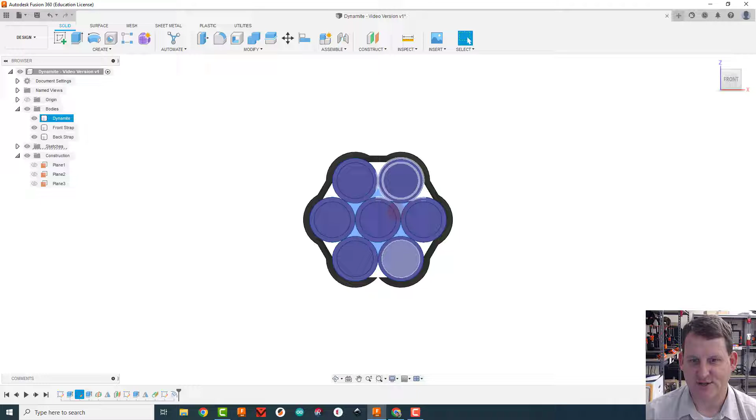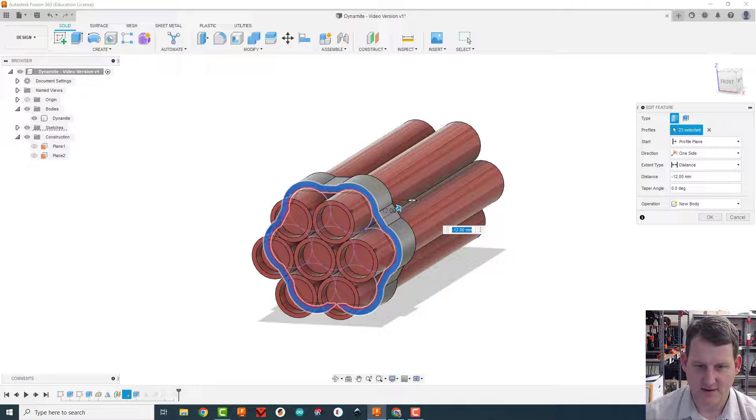I'm going to right click on it and do edit sketch. Actually I didn't want to do that, finish sketch. I actually don't need to fix the sketch, I need to fix the extrusion. So this is the extrusion that made, you can see it made that piece right there. If I right click on it and do edit feature, I can click to the front view and say, okay, yeah, I'm missing that little piece right there. And when I click OK, it's going to fix the front one, and because the mirror was after it, it's going to fix the back one as well. So everything is perfectly fixed now. How cool is that? You can just go back in time, fix things, and they ripple through and fix everything else.

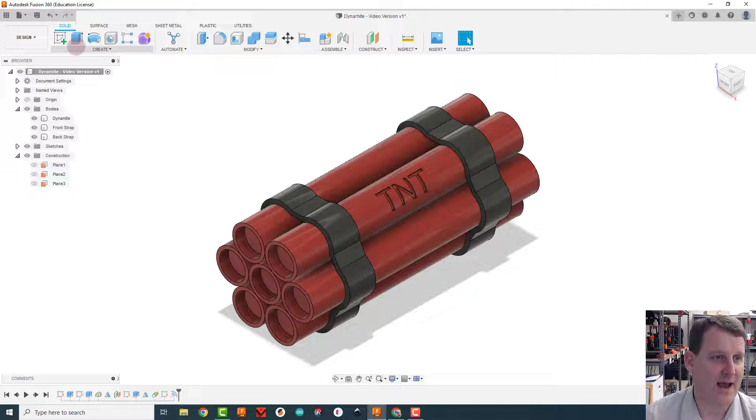All right, next thing to do is blasting caps. To do that, we're going to create a sketch on one of these inside flat pieces in here inside the Dynamite. So on that flat face right there is fine. And just like before, I'm going to project all of the other inside curves to my sketch. Click OK. I'm going to hide all my bodies real quick.

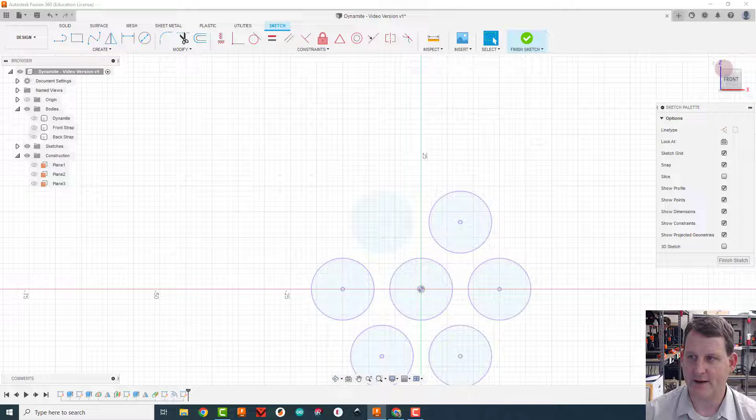And then I'm just going to extrude these out. So I'm going to hit E for extrude, and I'm going to extrude these out 2 millimeters. Now I'm going to actually turn the Dynamite back on so I can see what I'm doing, make sure I'm going in the right direction. And yep, that's the right direction. I'm going to come this direction, but only 2 millimeters.

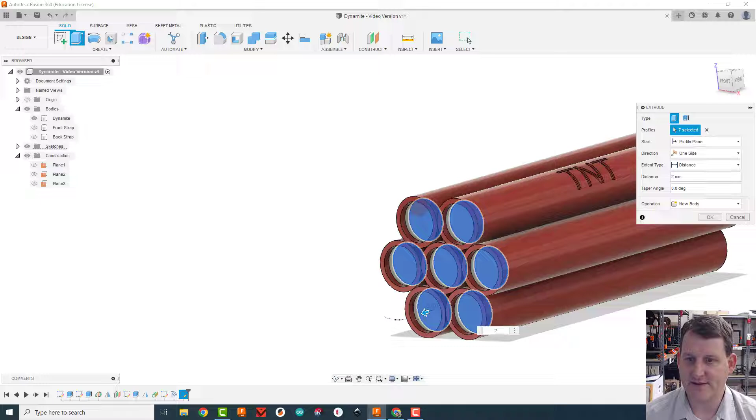Now this part's really important. I want to make sure here that it says new body instead of join. Otherwise, it's going to make the blasting caps part of the red, and I won't be able to print them separately and get different colors. So new body here, and click OK. Now when I did this, look at how many bodies it made. It made a ton of them.

So what I'm going to do here is let's make a new folder real quick. Right click, new group. Yeah, new group. And we're going to call this group fuses. And I'm going to take all of these bodies. So click on the first one, hold down the shift key while clicking on the last one. It'll select all the ones in between those. Grab them and drag them up into the fuses folder. The reason we're creating a folder for it is now to hide them, to get them out of the way. We can just click on this and all of them disappear. So instead of clicking on 7 things and off 7 things all the time, we can do it one at a time.

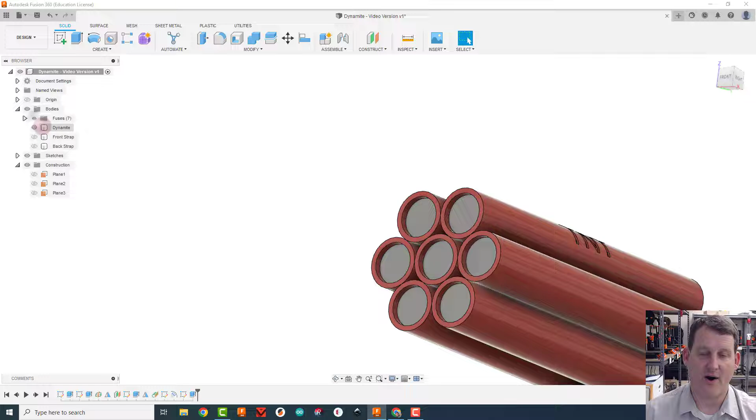All right, next thing we want to do now is make sure your fuses are on, you can see them. We're actually going to do A for appearance. And let's see if we can just drop black on the folder. I don't think we can. Cancel. Nope, we got to do it individually.

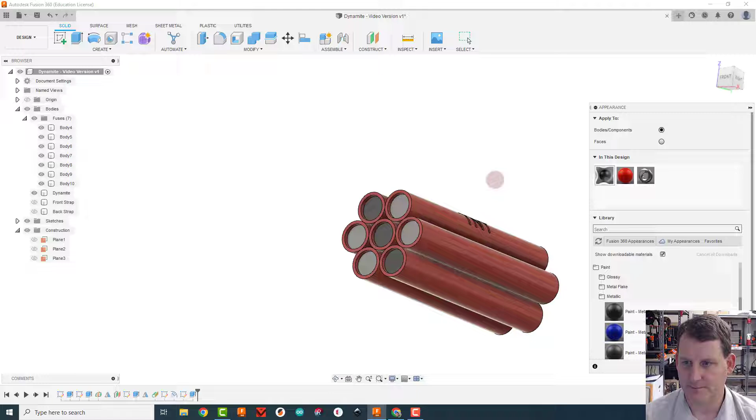So I'm going to come up here and just grab black ones and drop them onto all of these bodies real quick. You don't have to do this step. I think it's cool to kind of see what it's going to look like as you do things, and it helps them stand out a little bit more.

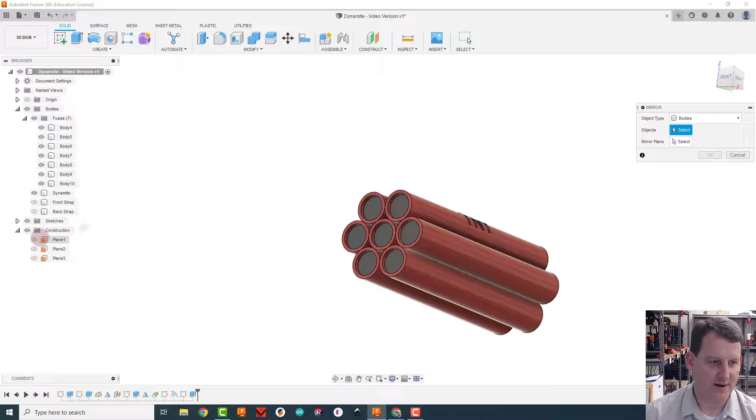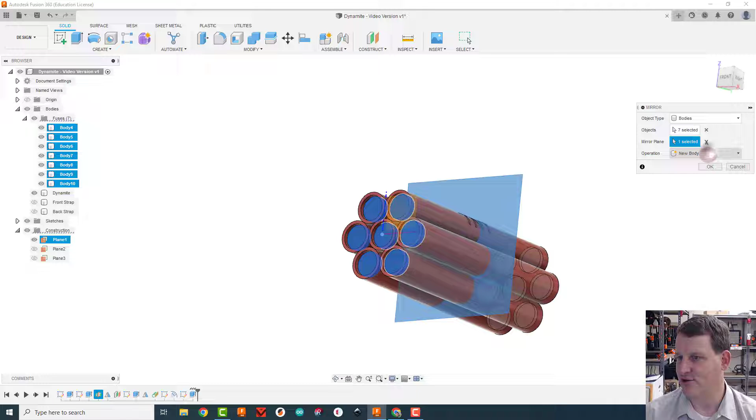That's that one. All right, so close. And now what we're going to do is we're going to mirror these blasting caps to the back half of it as well. And to do that again, we're just going to do that same thing, mirror, turn on plane 1, so you have a mid plane turned on, and we're going to mirror all of these bodies. So I'm going to go through here and just click on all of these bodies. Be sure to avoid the Dynamite. You don't want it all blue, you just want those inside pieces blue. You're going to do mirror plane of this mid plane. You can see it's going to make those things back there, and make sure it says new body and not join. Click OK, and now you just have all of these bodies just got made.

So I'm going to right click on the bodies folder and create a new group. And this group I'm going to be calling, whoops, double click on it. Oh man, close that. Group 2. And we're going to call this back caps. Click on that body all the way through all the bodies and then drag them into the back caps folder.

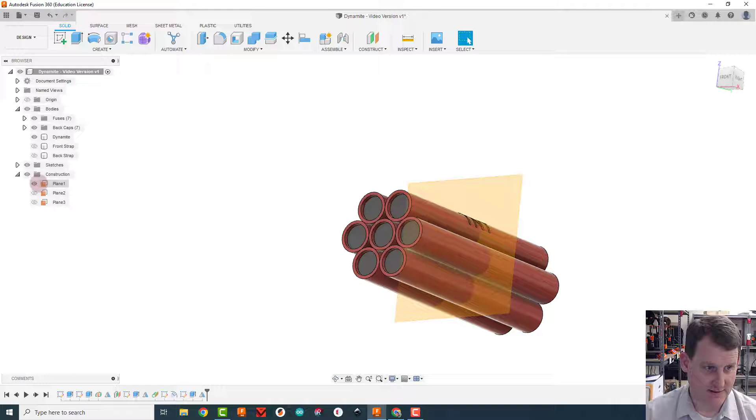Click on this little arrow to minimize the folder view. And there it is. I'm going to hide my plane 1, and now I've got blasting caps on both sides of my dynamite. Awesome, we are getting so close.

This next part's the hardest part. It's creating the fuses. To do this, we're going to create a rope, like how ropes are lumpy and woven. So we're going to create some lumpiness, and then extrude that. Instead of straight out where it would look kind of boring, we're going to extrude it around a curved path, and while we're extruding it, we're going to twist it like the rope does. It's crazy how cool it looks when it's done. All right, let's get to it.

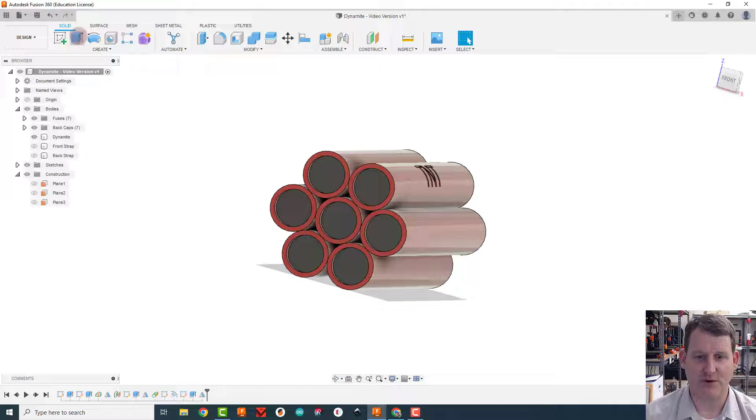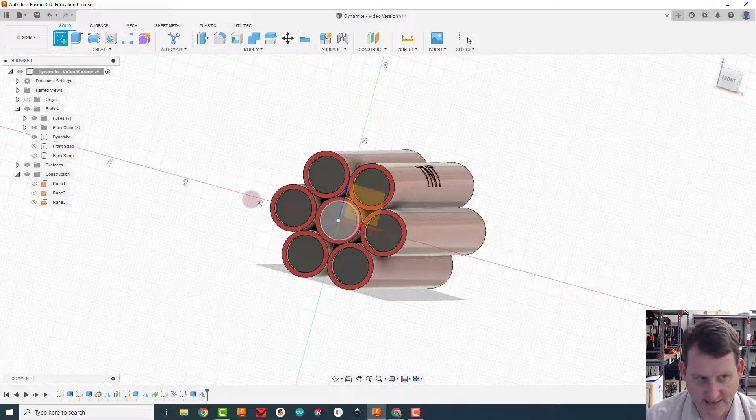All right, so I'm going to get rid of this picture real quick, and I'm going to start on this middle one. So I'm going to create a sketch on this middle blasting cap - it's hard to get to. In fact, I might even turn off the dynamite, turn off the back caps, and find the middle one. Let's leave those on, that's fine. Now I can easily click on the surface because all the other things are gone.

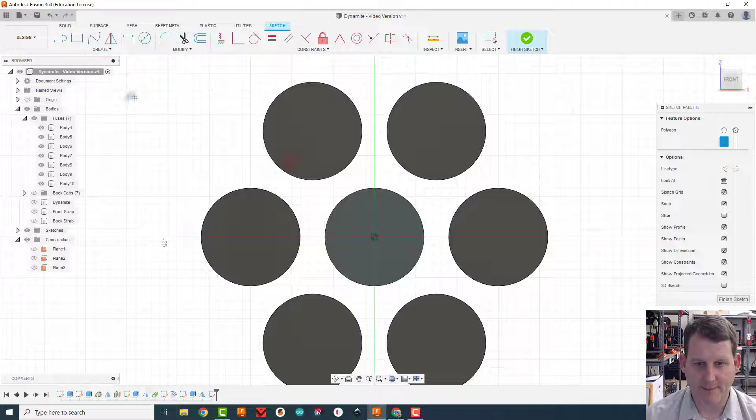Okay, so I've got my sketch right there on this surface. And what I'm going to do is create a polygon, an inscribed polygon, right in the middle. Let me pause for a second because I want to measure something before I move on to the next thing. All right, I just wanted to check the measurement on this.

So I'm going to actually use an inscribed polygon - first, switch over to a construction type, and then let's make it 1.5-ish. How does that look? That looks pretty good.

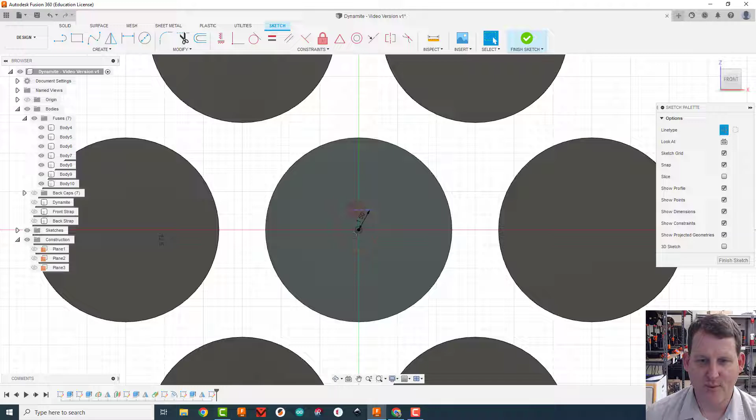I'm going to try and line it up so the flat side's on the top or the bottom. Hit enter. It's not quite perfect, so I'm going to use my horizontal vertical constraint and just click on one of the bottom or top sides, which will make that side perfectly flat and line up all the other sides. Everything's locked in now.

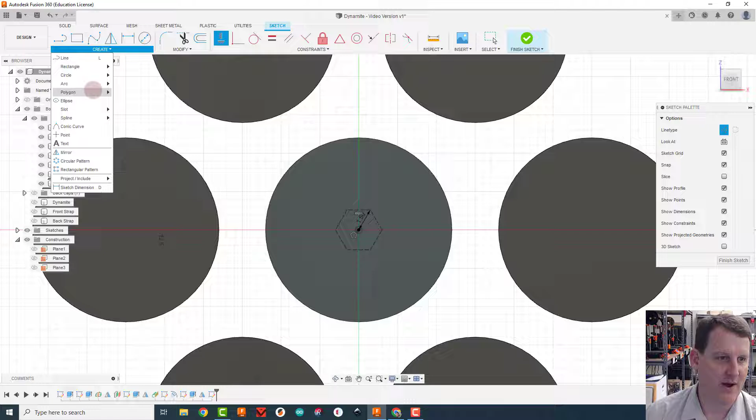Now that's going to be the center of my rope. I need to make the little bumps for all the little pieces of rope that roll through. To do that, I'm going to go create a 3-point arc tool, and turn off construction lines.

And to use this tool, I'm going to zoom in. I'm going to click on one corner of the polygon, click on another corner of the polygon, and then pull out a bubble until I see the tangent markers, just like that.

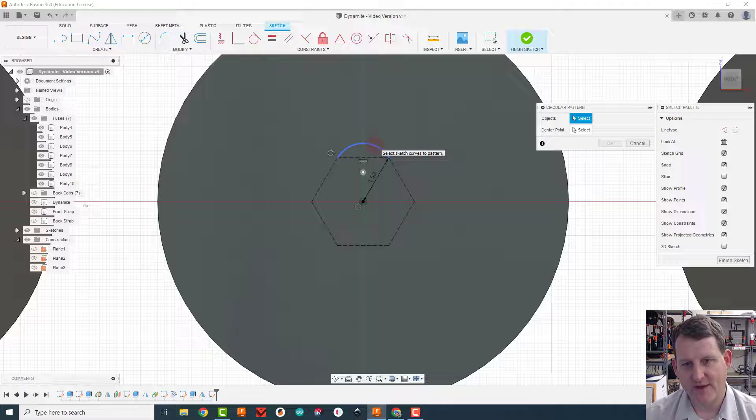Boom, just like that. Now, if I notice that this lobe needs to be on all of these sides, but it goes in a circle around this polygon, I can make my life easier by going up here to create, and then circular pattern. I want to pattern this 3-point arc, and the center of the pattern is going to be the center of this polygon. I want to make 6 of them, and hit enter. Now that's the shape of the rope with all the little lobes in it.

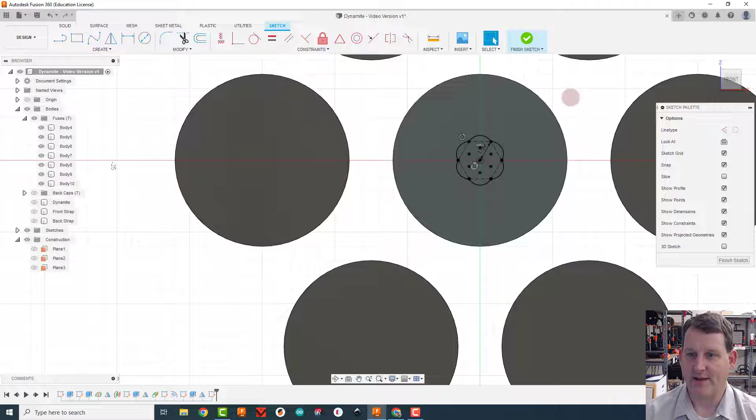When we extrude this out, we'll twist it and give it a really cool ropey look. All right, now the next thing we need to do - I'm going to finish this sketch. Next, we need to describe the path this is going to take. So this is going to go in a straight line out here, and then somewhere out here at the end it's going to curl up a little bit.

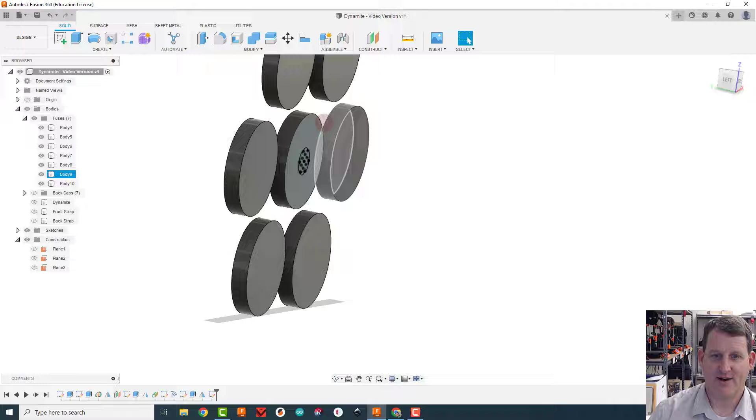All right, to do this well, what we're going to do is create a sketch that's flat across the middle here. And this part is the part that gets a little bit tricky. To do this, we're going to click construct, and make an axis. So an axis is like the center of a cylinder.

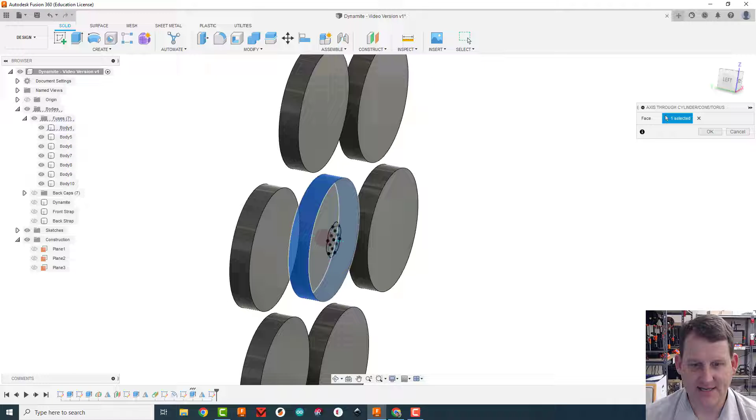We're going to click on axis through cylinder. We're going to click on the outside of this center cylinder we've been working on, and it's going to draw an axis, a line down the middle of that cylinder. I'm going to say okay. Now we need to create a sketch on this line, so we've got to create a construction plane on this line, because if I just try to create a sketch, there's nothing for me to create it on that's sideways like I want it.

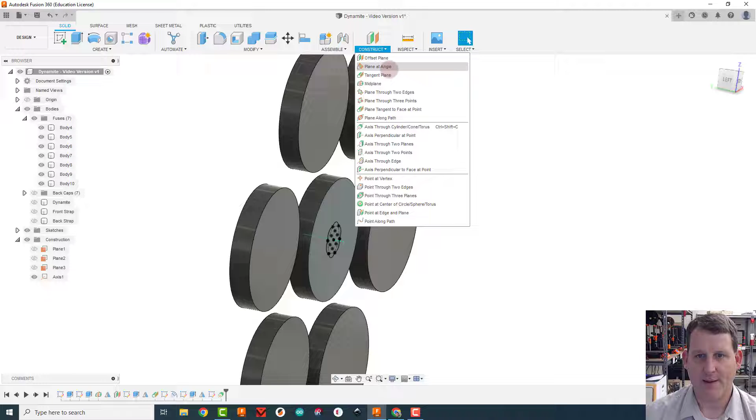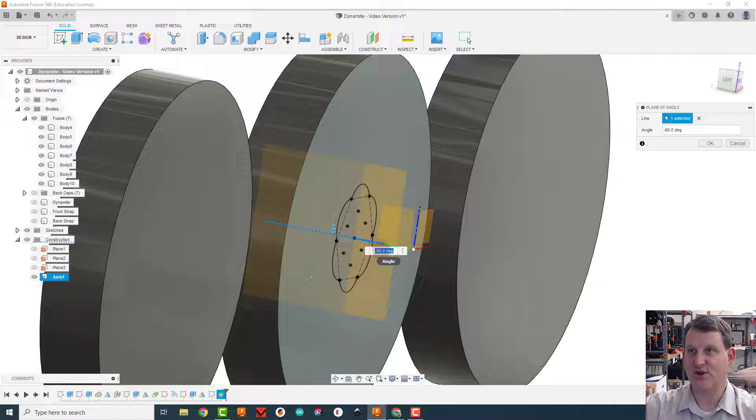I'm going to escape out of that tool and create a construction plane, a plane at angle. This allows me to click on this teal axis I just created, right there. I want to make this vertical because I'm going to have my 90 degree fuse curl up, letting me curl up instead of to the sides. Click OK. Now I'm going to create a sketch on this big orange one.

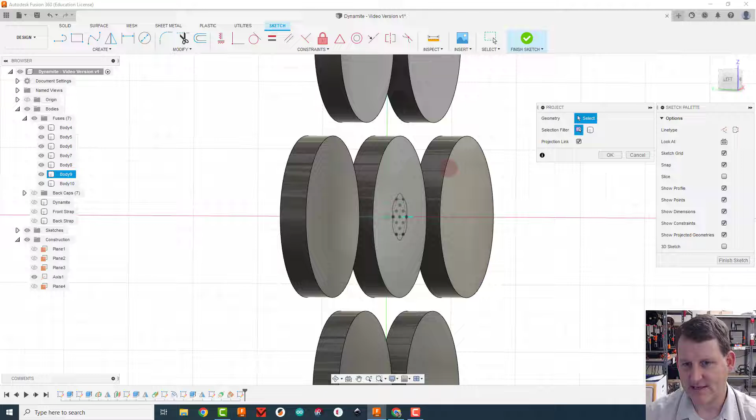I'm going to turn it so I can see it a little better. Yeah, I want it on this big orange plane right here. There's my sketch. I'm going to tip it over so I can see what's going on. I'm going to project this circle onto my sketch, and notice that when I project a circle onto a side of a sketch, it just becomes a straight line. Click OK, click back to left.

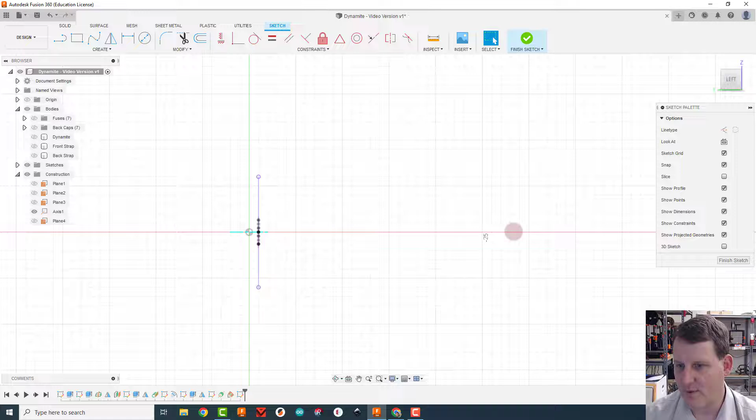Now I'm going to hide the fuses by clicking here. So my fuse now is going to start right at the middle, go straight out for a while, and then just curl up. I'm going to click a new line, start right here at the middle, drag it out, and this should be about 60 millimeters long.

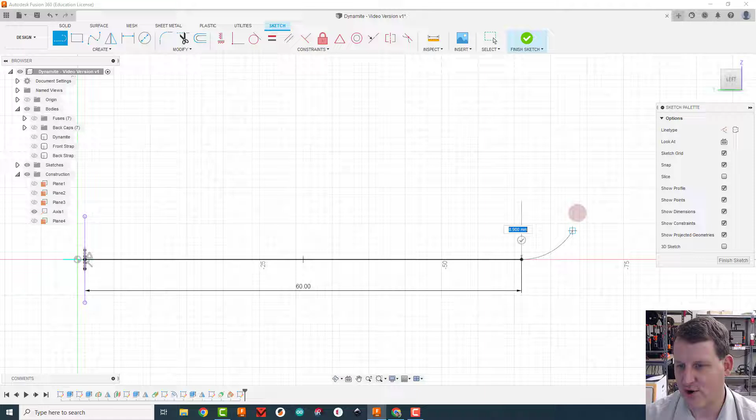I'm going to zoom out so I can see it better, and make sure it's out here perfectly flat. Click, and then I'm going to click and drag a curl into it. I don't want to go full vertical, like this—I definitely don't want to go back this way, it'll be hard to print. I want to keep it from going out at a weird angle like this, and I'm going to do it about like that.

Escape. See how it's still not vertical right here at the end? It's still kind of angled up a little bit—that's kind of what you want. You also want to make sure this has a tangent from this circle to this line. If it doesn't, use the tangent tool, click on this curve, and click on this straight line until you see the tangent symbol. For the next technique, we need the tangent symbol on all intersections between curves and straight lines.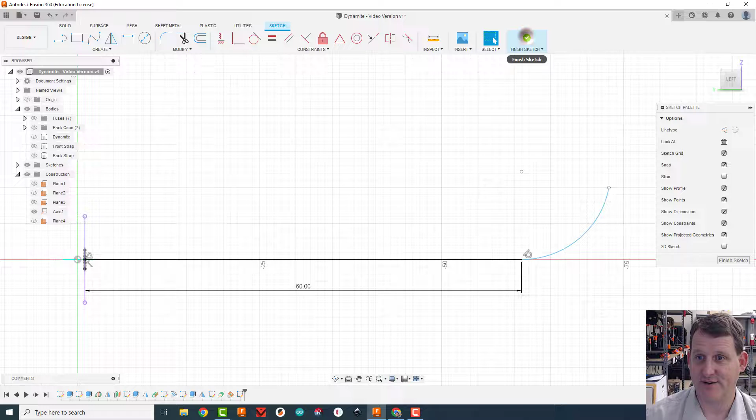All right, so we're done. Finished sketch. This is the path the fuse is going to take, and this is the shape of the fuse that's going to follow this path. Now, if we just do normal extrusion with E, it only extrudes straight.

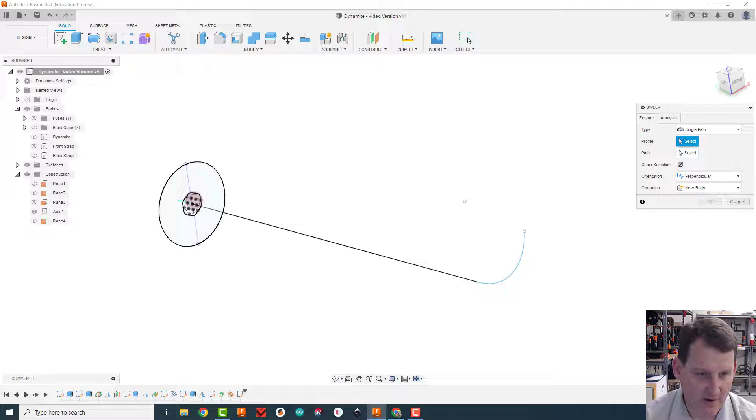So we have this other cool feature called sweep. Under the create menu, I'm going to click on sweep. It's going to ask me what profile I want to sweep—I'll say I want to sweep this weird rope shape. And the path it's going to take is along this strip. Notice how it just drug that through. How cool does that look?

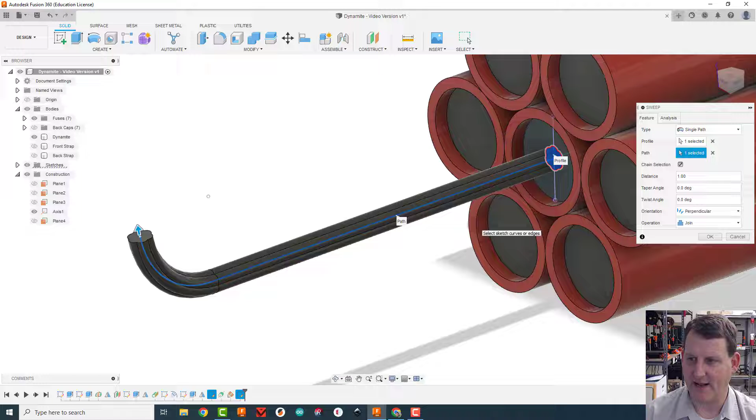So if we turn the dynamite and the fuses back on, you can kind of see how that's going to look. Now it doesn't have that twisty braided rope shape. To get that, I'm going to add twist angle, and add a lot of twists—360 degrees is one full twist, and we want a couple twists in here, so I'm going to do about 1,000 degrees of twist. I know the temptation is to put in a billion degrees, but all you'll do is lock Fusion up for 5 minutes trying to calculate it.

So feel free, I guess, but you'll be sitting there staring at it for a while. All right, now that's not really very twisty—I might go 1,200, let's see how that looks. Yeah, that's the right twistiness, that's what I'm looking for, that's good for me. Make sure it says join here—what we're trying to do is join this fuse to this blasting cap so they're one thing. Is that true? No, make sure it says new body—we actually want this to be separate for now. Then just click OK.

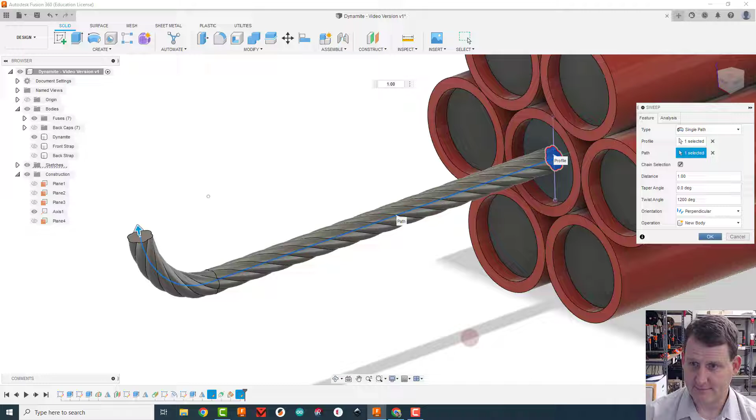All right, awesome, we just made this central fuse. Now we need to make one fuse coming out of this dynamite, out a little bit, curling down, and coming into this one—we'll dive it down and into it. Then we can use this one fuse we create here, which will take a little while, to do a circular pattern to make all the rest of them really fast. But that's going to be the next video. Good job, hang in there.

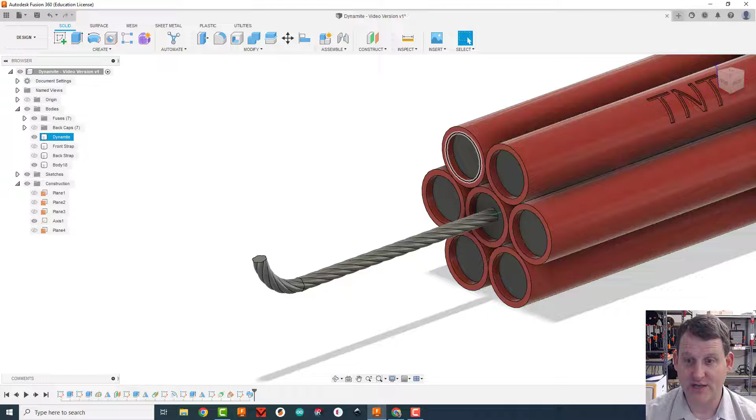Let me go back to home view real quick, and let's put the straps on so we can see what everything looks like. Oh, that's starting to look like dynamite. All right, we'll see you soon.